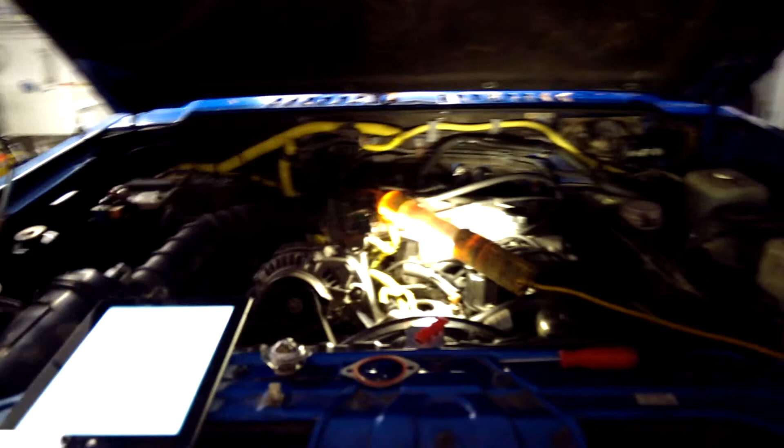I forgot to install this thermostat properly. I just put it in there originally. You can see the mounting hole there. I used the gasket and a bit of sealant - I've got it over here, it's called Right Stuff Gasket Maker.

The point is, I went through and installed it, but I just kind of put it in there. I didn't really take care of how I was doing that. And this being a new engine, with the amount of time, effort, energy, and money I've spent getting all this together, I just want to take care of it.

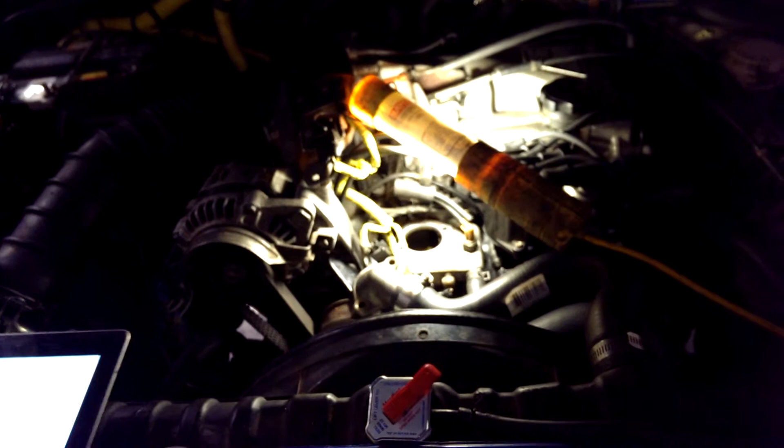So what you're looking at here is the iPad with a factory service manual for this particular engine, the 3.0 liter 1989 Mitsubishi Montero.

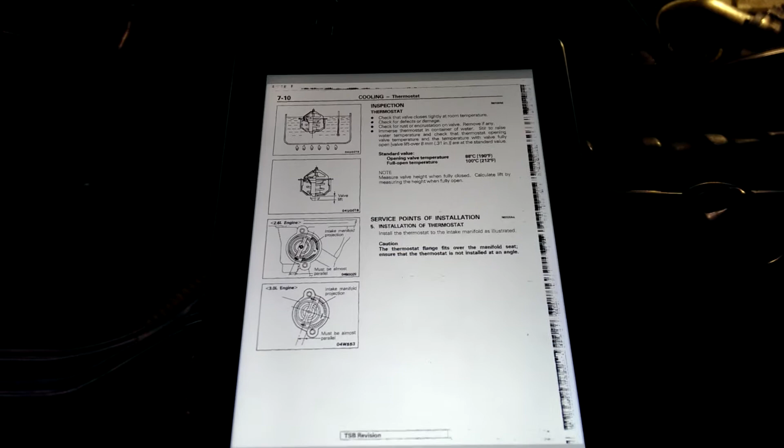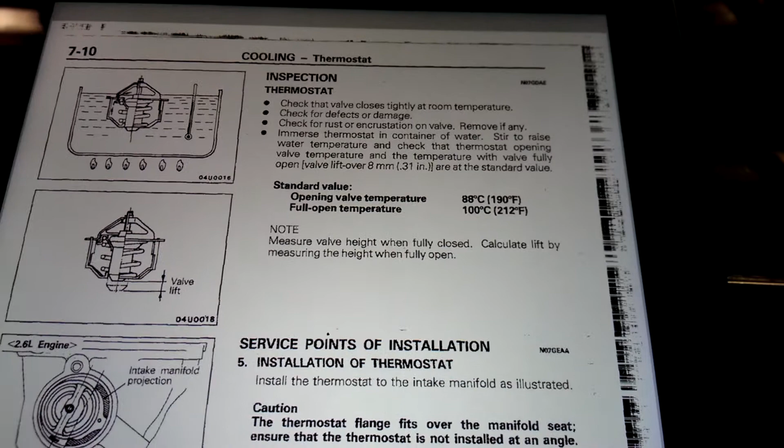Now in here it talks about a couple of things. It talks about the exact temperature setting for the opening valve temperature, which you can see is 190 degrees. And down below you can see how to install this - service points of installation, number 5, installation of thermostat: install the thermostat to the intake manifold as illustrated.

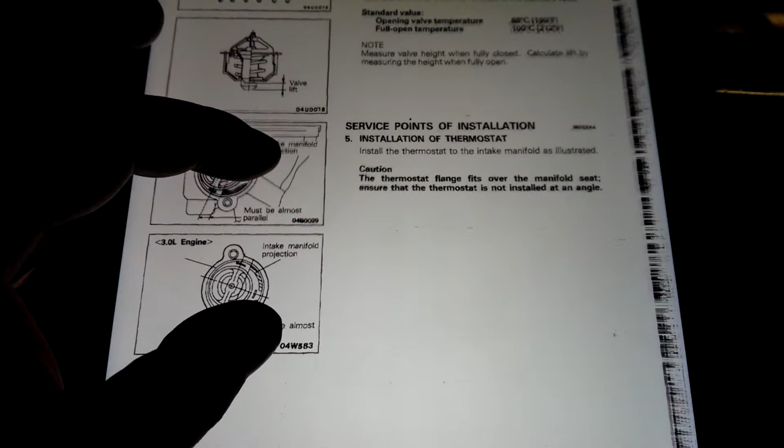Alright, not a big deal. Caution here: the thermostat flange fits over the manifold seat. Ensure that the thermostat is not installed at an angle.

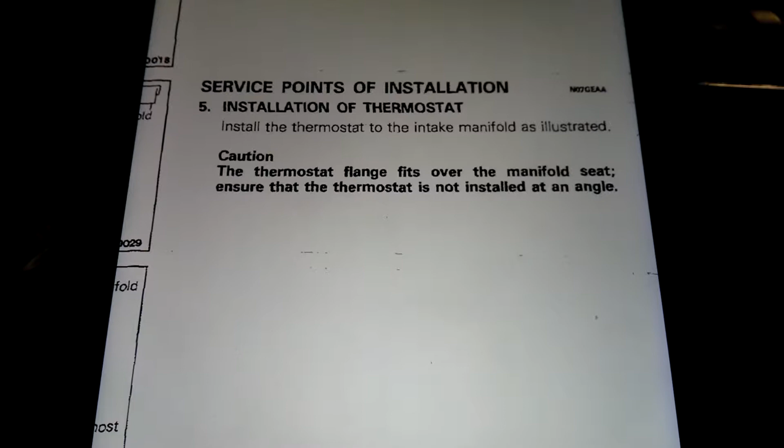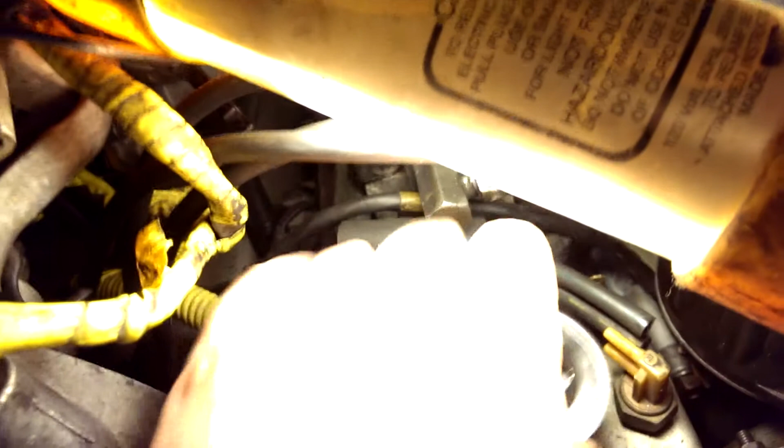So I guess what that means is there's a really tiny little seat here that you can just make out. If I install this, you'll see how it fits into that seat, flush along that rim. You can see how I'm rotating it here - it fits flush inside that seat. So what it's saying is don't install it at an angle, kind of like what you're seeing here.

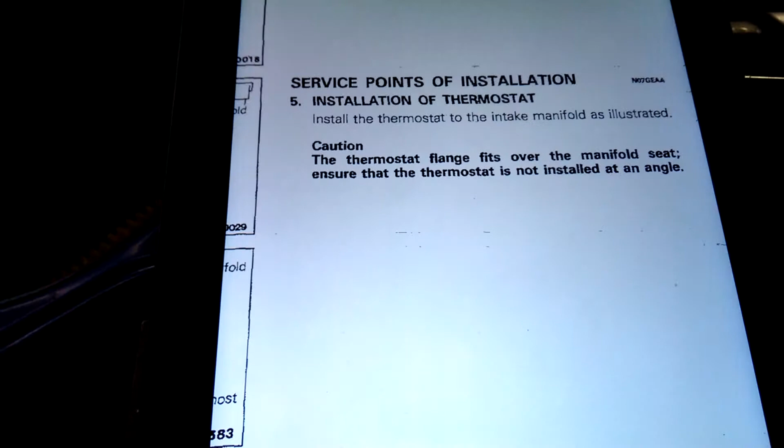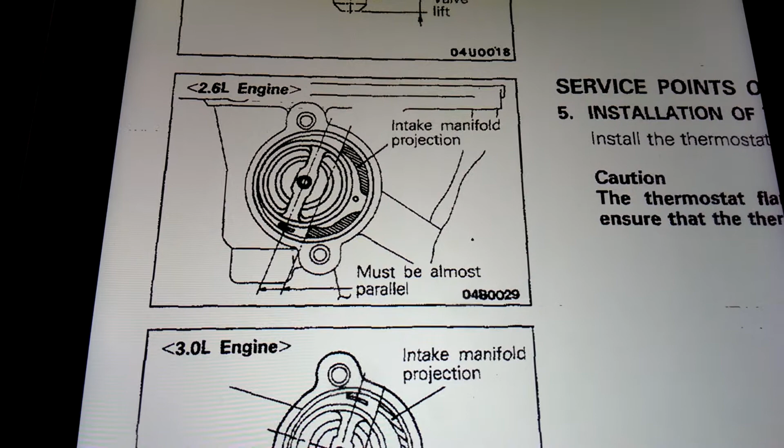Now the other thing is, when I looked at the factory service manual, it says install the thermostat to the intake manifold as illustrated. When I look at the illustrations here, it shows what's referred to as the intake manifold projection, and it must be parallel. That's for the 2.6 liter engine, and what we're looking at now is for my 3.0 liter engine.

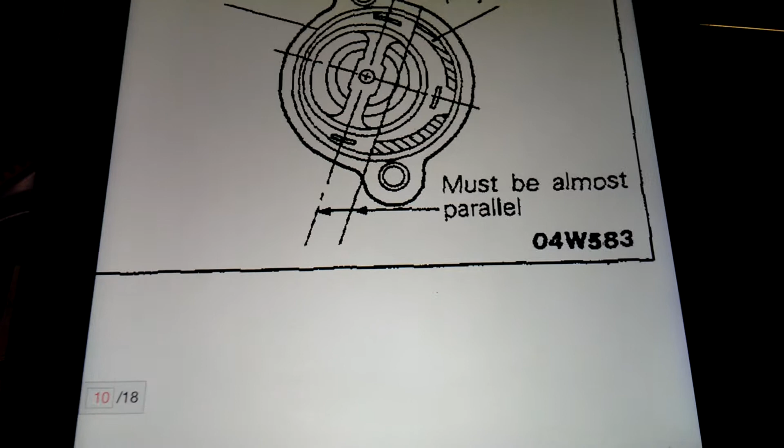Intake manifold projection refers to that little line that goes up and down, the one on the far right - it's vertical. Let me see if I can do this better. This line in particular is the projected line.

So this line corresponds - let's take a look at the intake manifold - to this particular line that goes across here. There's a little bit of webbing or a collar here, and you'll notice that if you extend an imaginary line through it, that line would be just north of this particular mounting hole.

Now the reason that's important is when I look at this image, these two mounting holes you can see - one here and one here - don't really correspond to how this image is laid out until you rotate it.

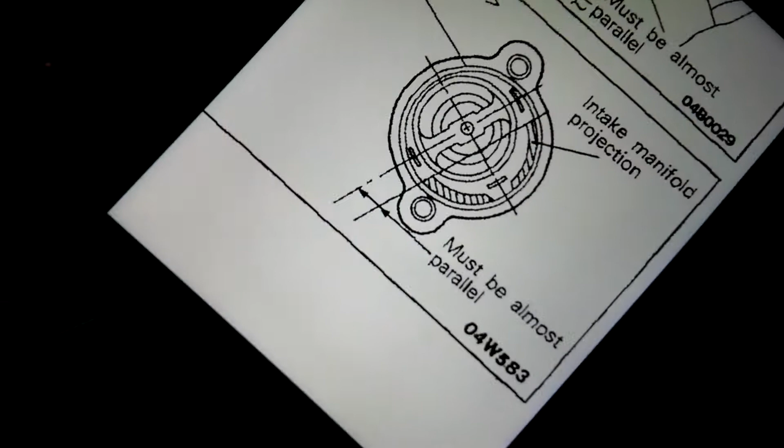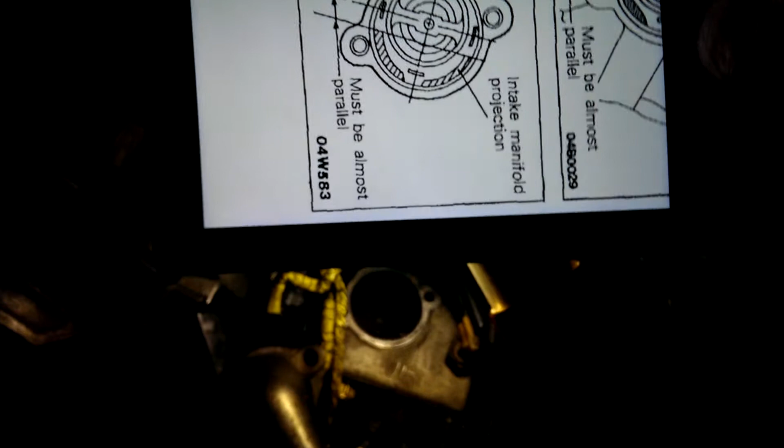Now you'll notice, if I try to match up the lines here, that the two holes line up. And that projected line refers to that little metal channel here underneath. The instructions say that when you install the thermostat, those should be parallel.

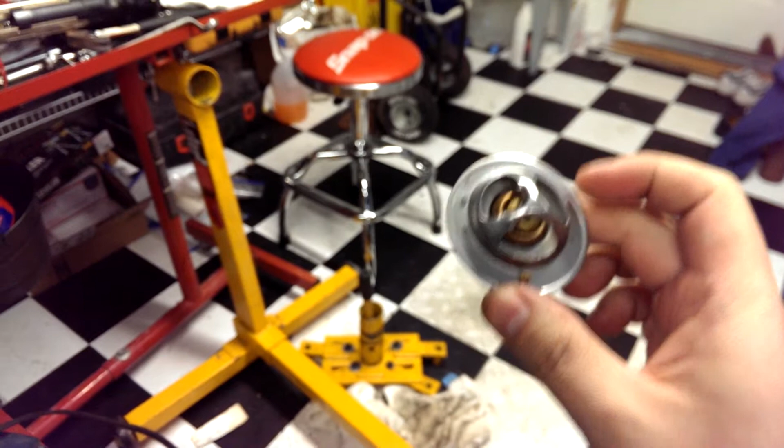Now the markings on the thermostat are kind of hard to see, so I'm going to get into the light. You'll see these two little rivet holes up on the top and on each side - that's the horizontal line. If I were to run an imaginary line through that, that's where the mating lines need to be parallel.

Now what I'm going to do, and I'll finish this up later, is when I install this, I want to make sure the imaginary line that runs between these two sets of rivets runs parallel to that channel I called the port earlier.

Maybe that works a little better - this rivet and this set of rivets. So there's an imaginary line that goes through there, and that's what's supposed to be parallel to the bottom. I'm pretty sure that's right.

What I'm going to do is seal this up, and I'll let you guys know how that works out some other time.